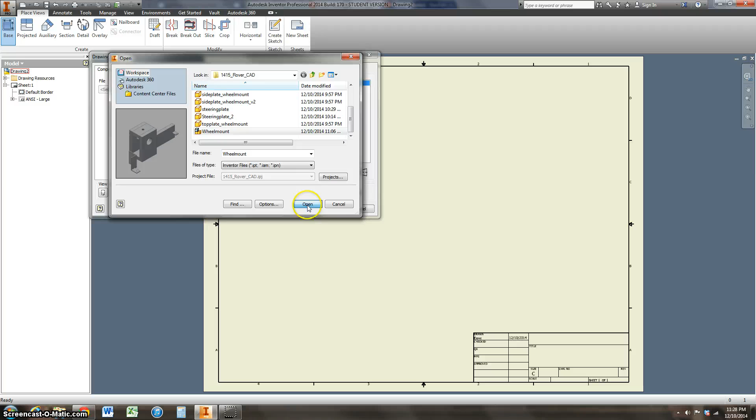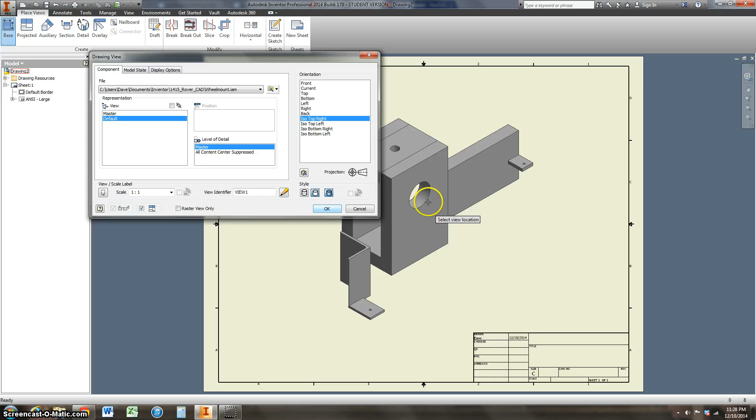Your first view is going to be the isometric, and a lot of times if you did it from the perspective you want, it's going to be the top right view. I'm going to make sure that I select this one. This is the shaded version, this is hidden lines removed, so my first one I want the shaded version. I'm going to come over here and just place it where I want it. These are 90-degree projections from that isometric view, and I don't want those, so I'm going to right click and hit OK. So this is my isometric view. I can take this now and move this around wherever I need to.

The next thing we're going to do on this first sheet is come up here to Annotate, and we are going to make a parts list. So I select Parts List, and it's asking me what view. I'm going to select this. This is the view that I'm going to create my parts list from. So I just select this and hit OK.

This arrow changes from red to white, and it gives me a box. I can put this box wherever I want. I'm going to left click to place it, and right there is your parts list.

It's that simple. When I zoom into here, it shows me I've got 2 of my side plates, 2 of my top plates, 1 steering plate, 1 bracket 3, 1 bracket 1, and 1 bracket 2. Mine goes 1, 2, 4, 5, 6, 7. My third part, I actually made 2 side plates - I did 1 for the tutorial and 1 for practice, so that's why I'm missing part number 3.

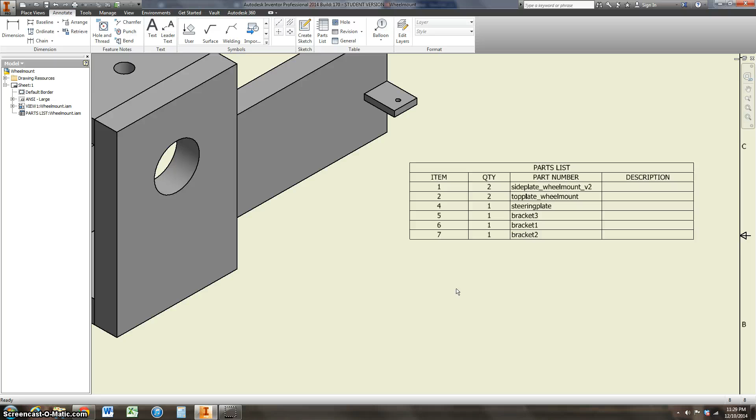So we're going to double click this, and there's nothing in this description column, so we can get rid of this. We'll come over here to Column Chooser, and we'll take the description and remove that from our properties. You can see there's all sorts of properties you can add in here, depending upon what you're doing.

Okay, so if I apply that, it gets rid of the description. And I'm going to go in here and force these to be different numbers so it looks nice and even. So I'll say this is 3, and it changes it to blue to tell me that I've changed the numbers from what it had. And this is going to be 6. Apply. Now my item numbers are nice and sequential.

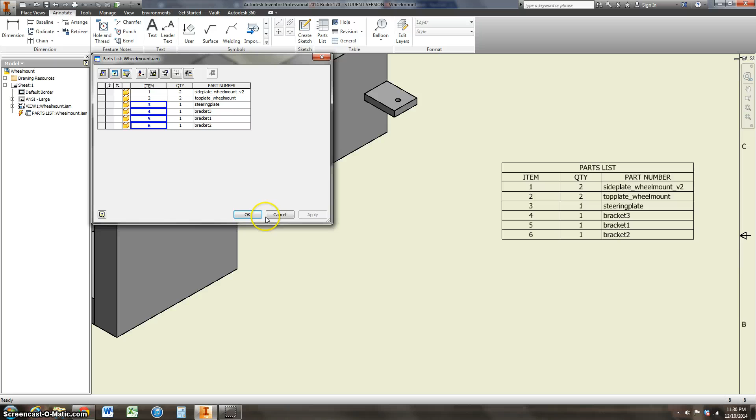The next thing I'm going to do is label all these parts. Come up here to Balloon, and you don't even have to know what these parts are, but if you click on an edge that makes it red, left click to select the part, drag out here, left click to place the balloon, and then right click to continue. It knows that this is part 3, that's the steering plate. Left click when it's red, drag it out here, left click to place the balloon, right click to continue. It knows that that's number 4, that was bracket number 3.

So you can go ahead and do the rest of these. Left click, right click and continue, that's a number 1. This is the top plate, so this one is easy to place and see that it's a number 2. But this one's a little bit harder, so I can come in here, left click to select it, and I can bend this line.

I can left click here, bring this out here, left click, and I guess you could keep going whatever you needed to. That's really not a good line, I'll delete that later. Select this one, left click to place it, continue, and you can balloon and label all of your parts very quickly.

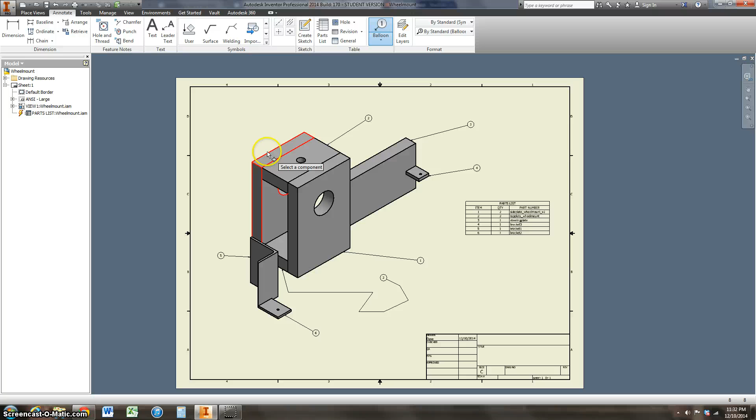I think this one is the last one that you need to do. Okay, so I'm going to hit escape to get out of the tool. I'm going to select this one, right click, and delete it because it's so sloppy. So I can come back here to the balloon tool, left click, and that's much better. I'll just hit escape, now that I guess I have to hit continue for it to place. Continue so it places, and now I can escape out of the tool.

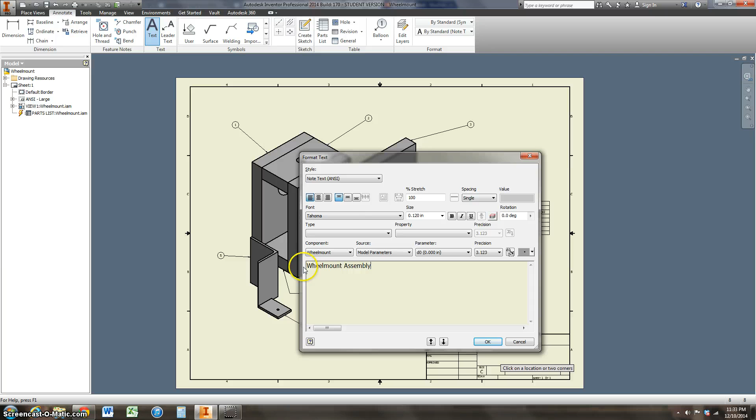So I have every single one of these parts labeled. This is going to be your first sheet. Come down here, I'm actually going to select the text tool, click in here, and just say that this is my wheel mount assembly. Each sheet should have a title of what it is. So this is the whole wheel mount assembly. It's already got the date and my name on it.

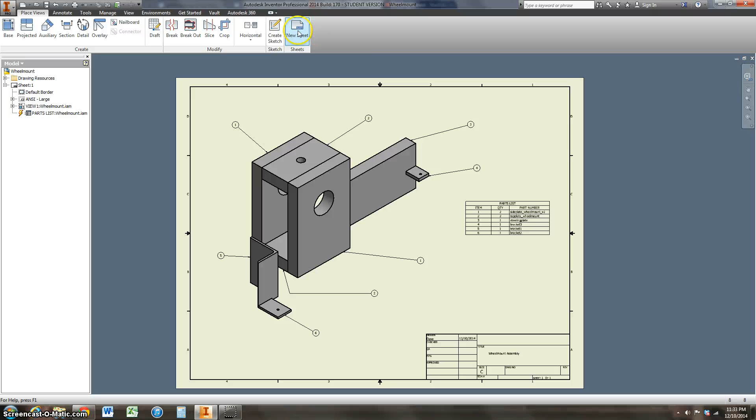You can click in any of these boxes as long as you're in the text tool and type in whatever you want to. And it already tells me that this is sheet 1 of 1. So I'm going to right click and get out of the text tool. So this is your first sheet. I'm going to come back here to the place views, and there's an option here for a new sheet. Brings back up a new sheet, and now I've already got my isometric view for all my parts.

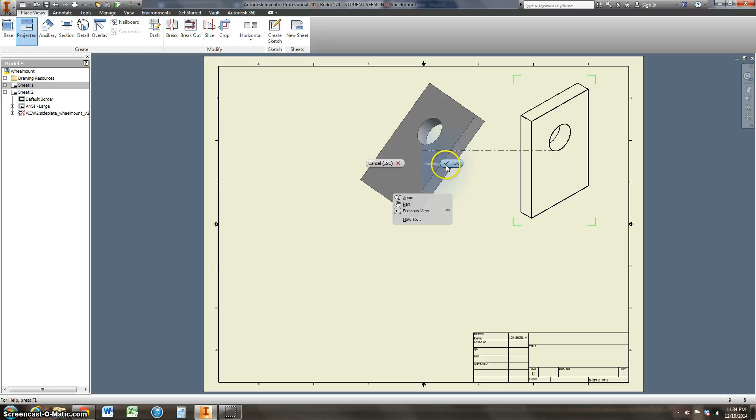Now I'm going to come in one by one. I'm going to do the side plate, and now I want to place in the top right hand corner, you want to place an isometric view. Right click and say OK, this is the only one I want. I'm going to double click this. I forgot to say that I wanted the shaded view, so it turns out to shaded.

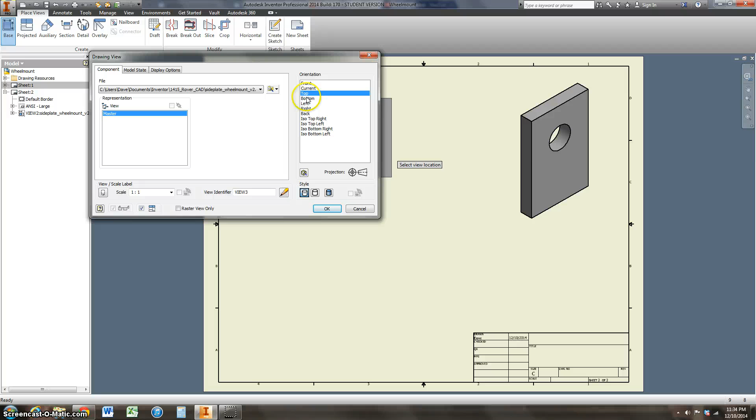I want to put another base view in here. Got to tell it that it's the side plate. And this time I'm going to cycle through here until I see which one I want. That's the face I want to see. And now I want the hidden line removed.

So I'm going to select this. And when I drag down, it does a projection. So this is the bottom view. If I click over this way, it does the side view. So I'm going to come down here and do the bottom view. Right click and say create. So now I can move these, and since one is a projection of the other, these two images are linked.

And now I'm going to come back over to annotate, and now I can do some fun things. I can grab this edge. Oops, I had to put the dimension tool. I can grab this edge, and it remembers the dimensions that we used on our drawing. So now I can add in the dimensions for all these.

If I grab this green dot, that's the midpoint of that line. So I'm just going to grab this and slide it over. So now I've got all my dimensions. This circle, I can just grab this and put the diameter dimension there.

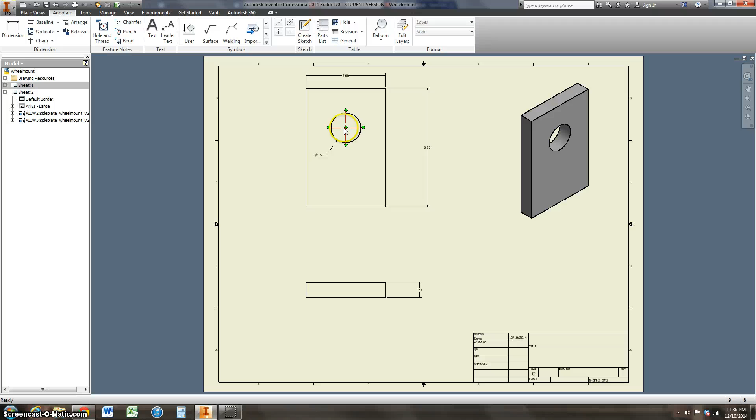I can also come up here. I'm going to right click, get out of the dimension tool. This is the little center of my circle. So it kind of just gives a little target there for the center. That way I can escape out of that, because I need to know where the center of the circle is.

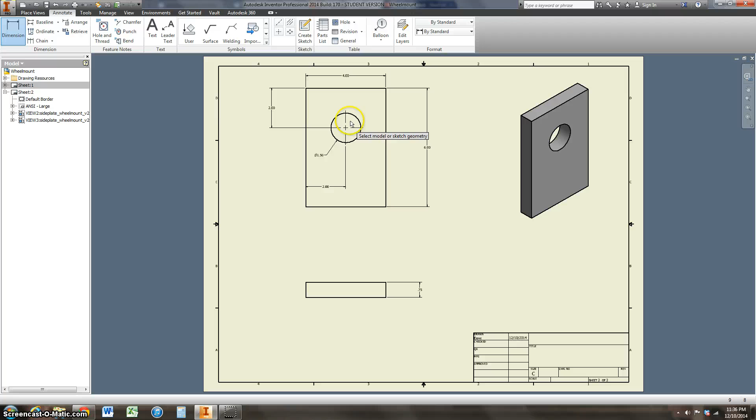So now I can dimension from the top of here to the center, where that is, and then from the side of here to the center, where that is. So now I've got all the dimensions, where the circle is located, the diameter of the circle, the size of this part, and the thickness of this part.

So you're going to do this. I'm going to right click and get out of the dimension tool. So you're going to do this for every single part. I'm going to come down here and hit text, and in the title, this is my side plate.

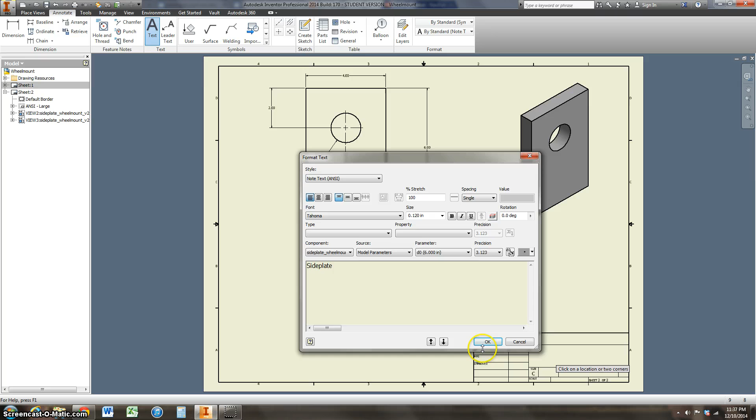So I'm going to hit OK. Now I've got this side plate. Right click and get out of that. Come back over to place views. I'm going to do a new sheet, come over here, and make it sheet number 3. Do a base projection.

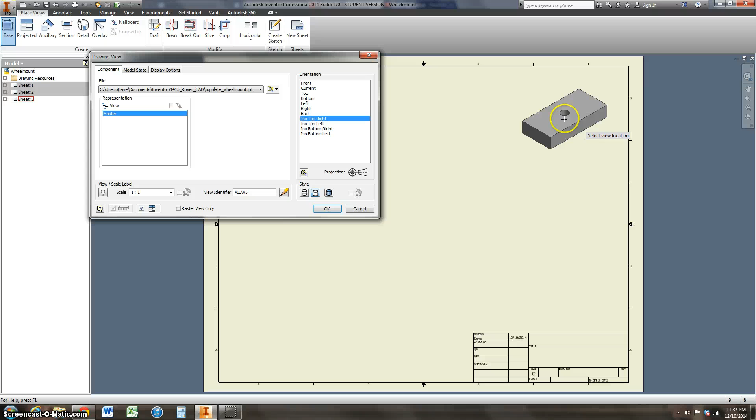I already did the side plate, so now I'm going to do the top plate, and I want the ISO view up here in the top right hand corner. Once again, I forgot to change it to the shaded view. There's no problem to change that.

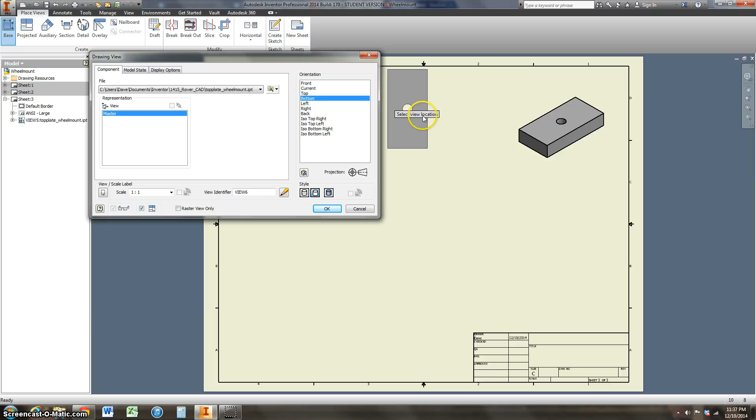Come up here, I'll pick another base projection of my top plate. This time I want this to be the bottom view. And that's the one I want right there. Select that, select a projection, and hit create.

And now I can go ahead, move both of these, and now I'm going to have to add dimensions to these. So I come to the Annotate tab, click on Dimensions, and start putting them in. You need to place these where they'll be easy for someone to see. You can even tell when this lines up parallel with the other one to make it look nicer.

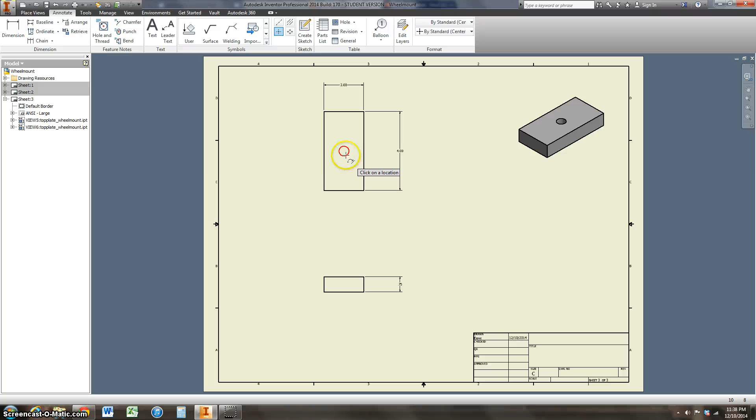I'm going to put the center on my circle so I can use those marks to dimension it. I'm going to put the diameter of my circle up here, and then from the bottom to the center is 2 inches, and these are all the things we included in our drawing, so that's why a good drawing is important. And then from the side to the center is 1 inch.

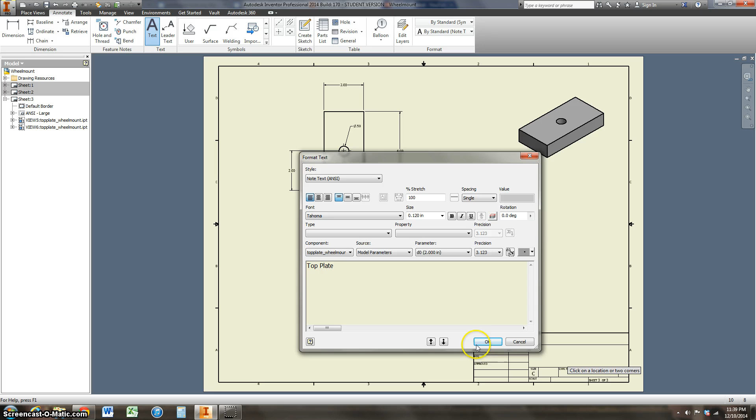Right click, get out the dimension tool, use the text tool to put the title in here, that this is the top plate. Okay, and you're going to keep doing this for every single part.

Okay, so the next thing, come here to place views, new sheet, and then just start over again, base view. I'm trying to think what's my next part. This big steering plate.

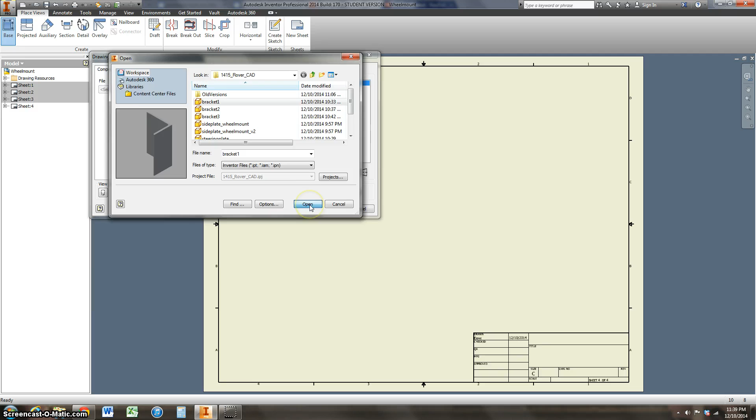Okay, I can't remember which one of the steering plates I used for the tutorial, so I'll just grab one of these, I'll grab this bracket. Put the ISO view up there. Right click and say OK. I forgot to change that to the shaded view so they can see what the part looks like.

Put another base projection in there. And this time I want just a wire with no hidden edges. And see, now this one's kind of hard to see. So that's a good view there.

And I can come out here to the side if I want to do one, or down here. And maybe I want to put both of those views. Once again, you're just trying to put what's going to be helpful in here.

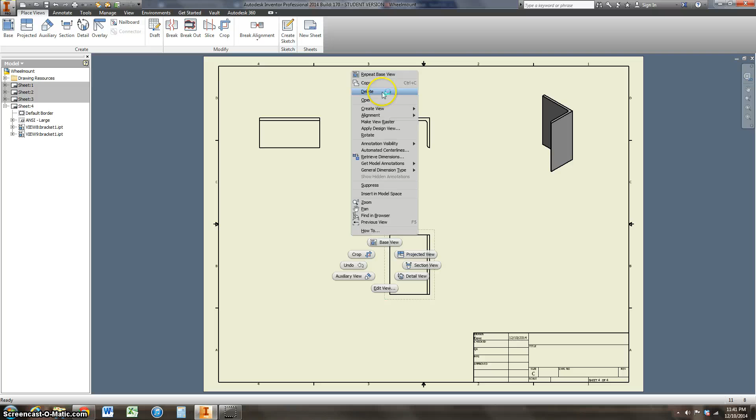So I'm actually going to see if I can delete that view. I think it's going to delete. Okay, just that one. So this is kind of small. This is off to the side, so let me delete that one as well.

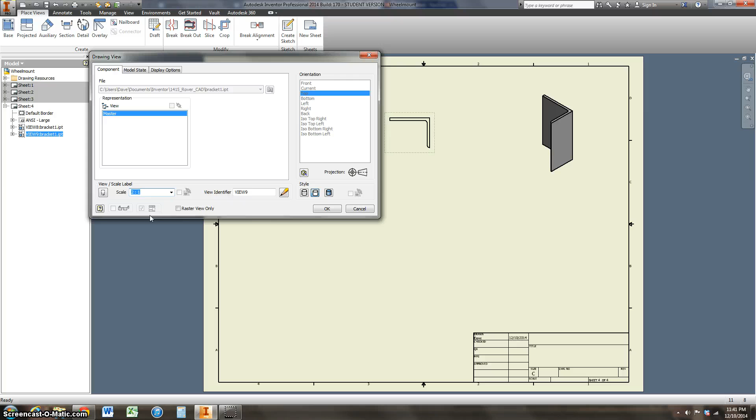So let me come in here and select this one. I'm going to change the scale and make this one bigger, so I can kind of, I'm going to put some of these dimensions in here. It's going to be hard to see. And then I also need this. If I double click on this, that's okay.

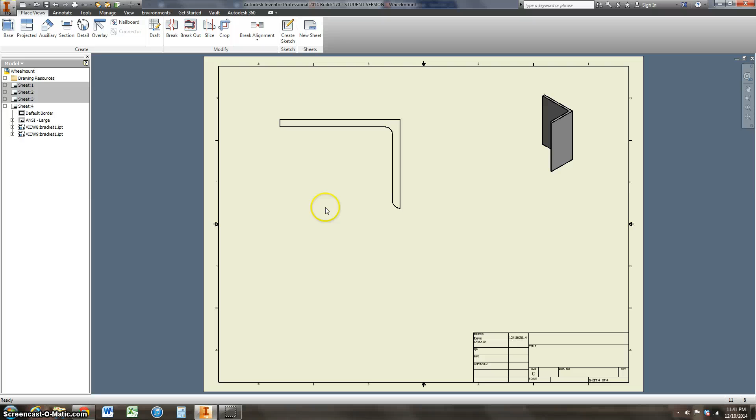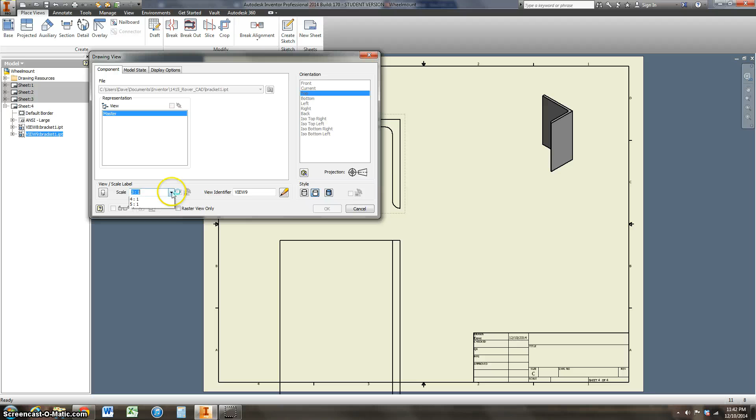I think I'm going to go 3 to 1. Okay, and now I want the projected view down here. So I can just say projected. Okay, and now 3 to 1. This was way too big. So hit create. And just come back in here and change it to 2 to 1. And that changes both of those.

And so now I can move these. I can move these up. I can move this up. So once you've got them where you want them, and they're the right size, come back to annotate, and you can do all your dimensions. Okay, that's thin enough.

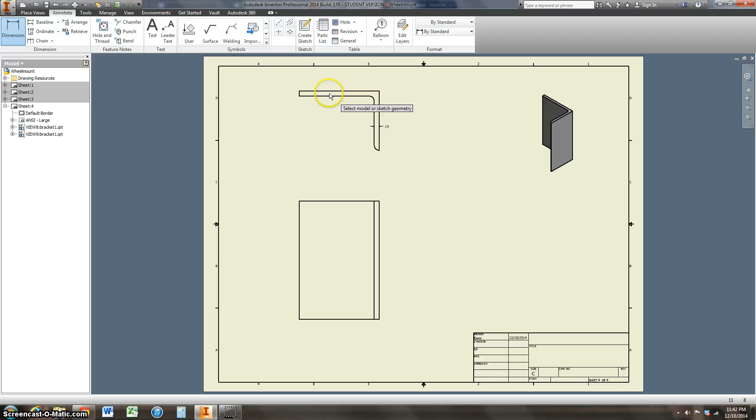It's going to put it right there, and it rounds to 2 decimal places. Between here is the same. Put that length. And you can even do the little radius of curvature.